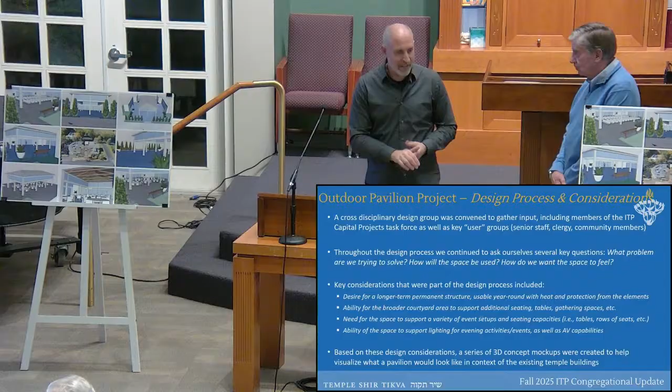Based on all of this, there was a number of 3D mock-ups that we created, and I'm going to turn over to Roy, who's going to walk us through those right now. Thank you, Adam. Roy McDowell.

Okay, next please. This is an overview of what the pavilion would look like relative to the existing building. We spent a lot of time with our committee talking about the size, shape, windows, and columns. What we've done is align the gutter line of the existing building to the gutter line of the new structure so they're the same elevation. That means the windows going around the perimeter match the windows similar to what you see here, giving us a consistency of look, and we'll have light coming through.

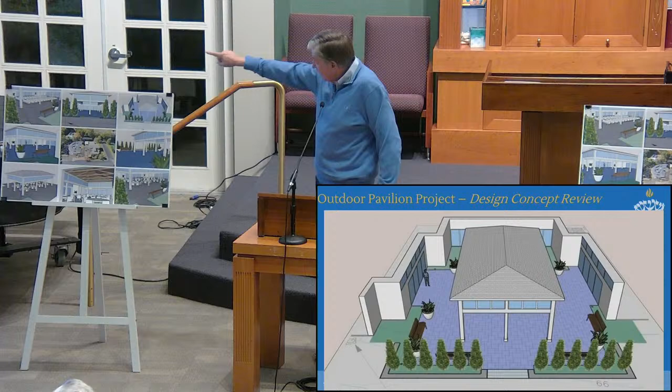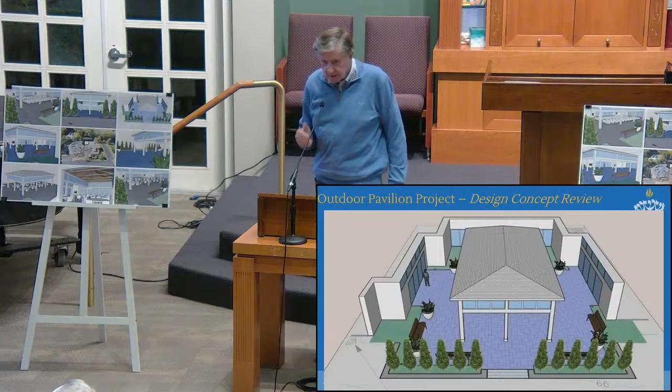You'll also notice the entire courtyard right now, which is basically gravel and some grass, is pitching towards the wetlands. That gray line in the foreground is actually a retaining wall, about 2 feet tall with a set of steps through the middle. The reason for that is we're raising the grade, so it's just got a very slight pitch away from the building, but basically flat. All the area that looks like paving, at least in this concept, we're looking at doing in granite. Why not bluestone? Believe it or not, today granite's actually less expensive than bluestone, and it's more durable.

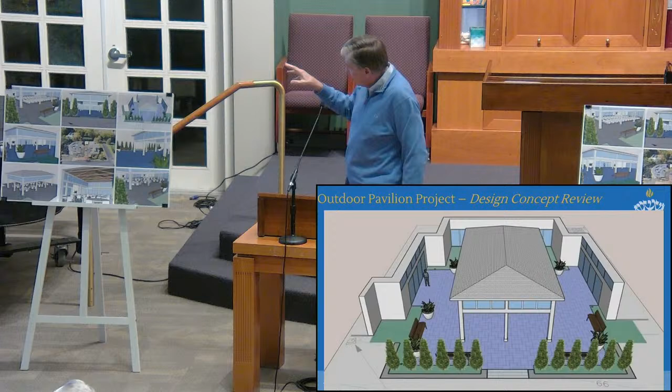So the nice thing about having the pavilion is we've got a tremendous amount of outdoor space for gatherings, for functions, seating. You'll see benches, landscaping, landscape lighting around the perimeter, and there'll be lighting within the pavilion as well. If we could go to the next slide, please.

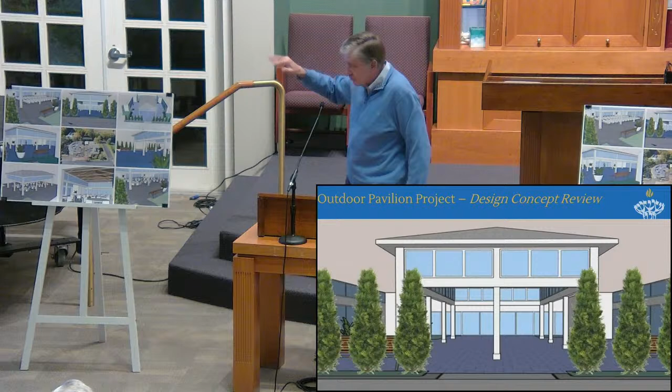Another view, you'll see the arborvitae hedge looking towards the wetlands and the solar panels in the back. You'll notice again the windows are on the perimeter to match the temple itself, and the general open field. Next, please.

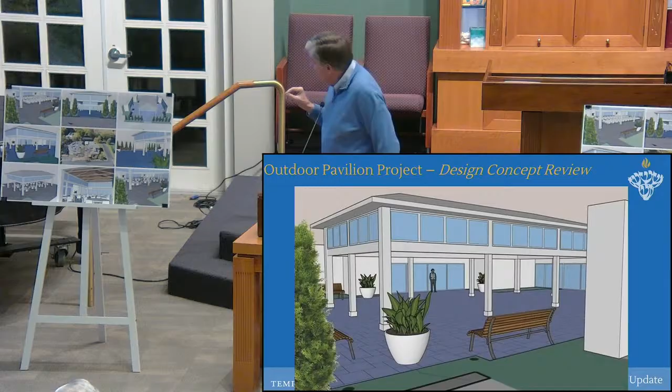Again, another view, you see a person standing just to give you a sense of scale. Now, the other thing I should point out, this could be used probably as much as 10 or more months a year. How is that? Because we're going to be doing electrical services for electric heat in the facility, in the pavilion. As Adam mentioned, we'll be doing AV wiring, lighting in the pavilion, and wiring for automatic blinds that will come down. Basically it's plastic material to keep the cold out, and there'll be an automatic lift so they go up and down when needed. So you could really extend the season quite a bit in that use.

Next, please. Again, just another view. You'll notice the columns. The closure could come in between each of these columns. Other than that, when they're up and out of the way, it just feels very open.

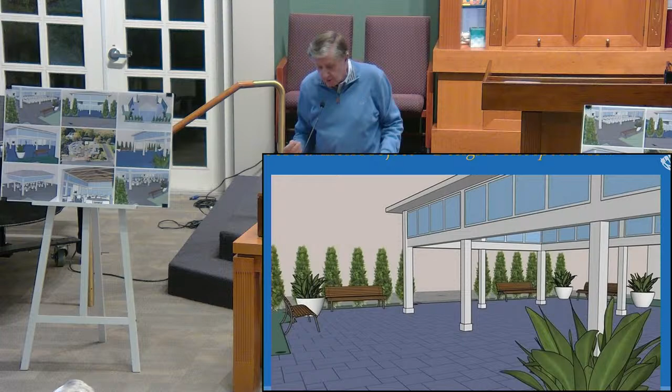Next, please. So we looked at a couple of versions. One is if you want to do seating for a service, and I think we can fit up to 120 people in this regard. We've actually widened it—it looks a little tight here, but we've widened it 4 more feet. It's now 28 by 48 feet.

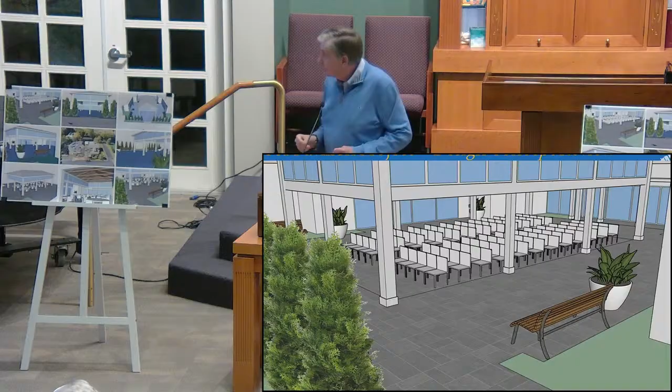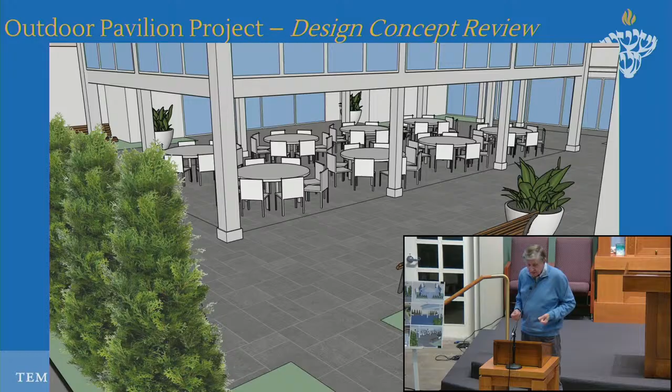Next, please. This is another version where if you have a function, you want seating and dining. I believe we can fit up to 64 people in that regard. Again, thinking about having a sound system and lighting, you can do all kinds of possibilities. One thing I'll add is that 64 people and tables is physically underneath the canopy. That's not including, if it's a nice day or evening, tables around the perimeter. You could do over 100.

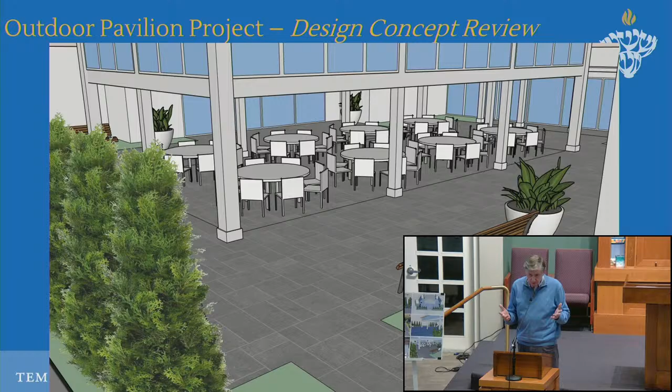So if you'll notice, the exterior of the pavilion is basically all white, except for the shingle roof. So we thought we'd do something a little different on the interior, and we vaulted the ceiling up. You'll see exposed beams, trusses—maybe could be gray, could be brown. We did brown for now, just to give a little warmer feel so it doesn't feel so vacuous. And the nice thing is we can do some track lighting within these beams to spread light across the ceiling to really open it up.

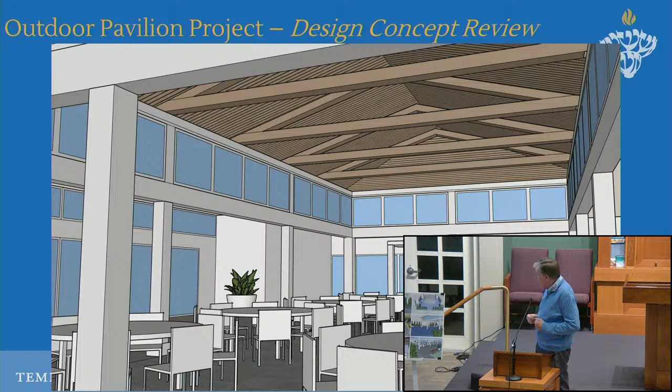Next, please. Again, just showing a version where if you're having seating, people coming and going, you'll see there's quite a bit of terrace space outside the pavilion itself. So you could, as Adam said, expand the seating significantly on a good day. Or if you're just having a social function and want to meander around and have conversations with people, it's very conducive to that. The other thing I should mention is you come through the main entrance and go through the doors in the back, the grade is flat, so that covers us from an ADA compliance point of view. The other doorways will have one step down. Next, please.

Just a little visual, to give you an idea what it might look like.

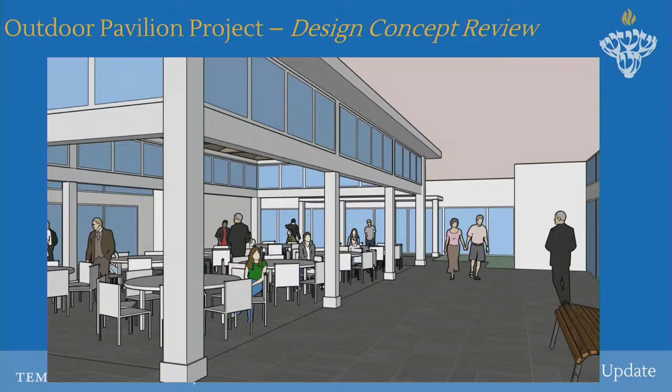Is it covered if it should be raining? Good point, we've discussed that. Yes, we're going to do some kind of an awning going from the building over, so if it's raining. We even looked at the idea of possibly doing it from the other doors as well, if it's necessary.

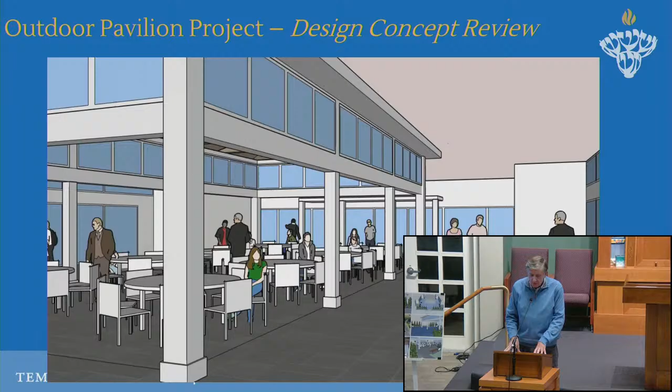So how long will this project take? We think, just to walk you through what would need to be done, we're talking about regrading the entire site, scraping it down, gravel base. We're going to have to put in a subterranean drainage system because the town will not let us shed the water into the wetlands. So we're going to have an underground drainage system. There'll be a gutter system on the building itself, drains within the terrace itself.

So we've got the grading, the drainage system, the footings going in for the pavilion itself, the construction of the pavilion, wiring and electrical services for the landscape lighting in the building itself. We've got the irrigation system going in, landscaping, plant beds, and of course the granite terrace itself. We're looking at a period of about 3 months.

Any questions? Yes? No, we think because of the amount of windows that are on the perimeter, it could be, but we didn't really think it was necessary. And aesthetically, it doesn't really go with anything right there now.

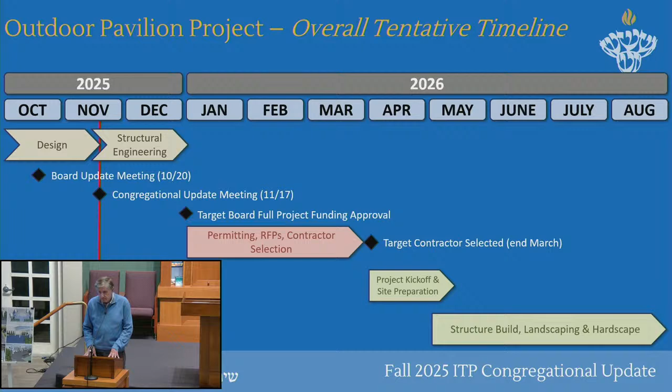The other thing, you talked about some type of shades or something. Yes. So people would be in there and you'd leave one of them open, or how would people get in? Well, they each operate independently. It's a separate switch. So if you wanted to close one side because of the wind, or the other side because of the rain, you could do that.

Okay, but you wouldn't close it off because there's... Well, you could. If it's 10 degrees outside and you want to use it and put the heat on, sure you could. So there's going to be heat in there too, you said? There will be. I'm just wondering how people are going to get in and out if we put these shades in. We'll have one section where there's a door. Okay, that's the answer I wanted. Okay, thank you.

So are you saying in the shoulder months, with the shades down, the heat will enable us to use it? It will be warm enough? It will be. I don't want to say January and February when it's 10 below zero, no, but I would say easily 10 months, could be more. Here's the other question: how much money do you want to spend on electric heat? If it's really cold and you want to spend a few hundred dollars, great.

Will there be any solar panels on it? No, we have enough solar panels. But I think we're doing well in that regard now.

Any concern about noise? The two contiguous rooms are... In what regard? In regard to the Beit Midrash, there might be study going on or something in the social hall. If you haven't thought about it, you've answered my question. Well, all the windows and doors in the buildings are thermopane, which means there's argon gas between the glass, so I think that helps mitigate the sound somewhat. I mean, if someone's out there beating on drums, sure, you're going to hear it, but if it's just people congregating, I don't think it's going to be an issue.